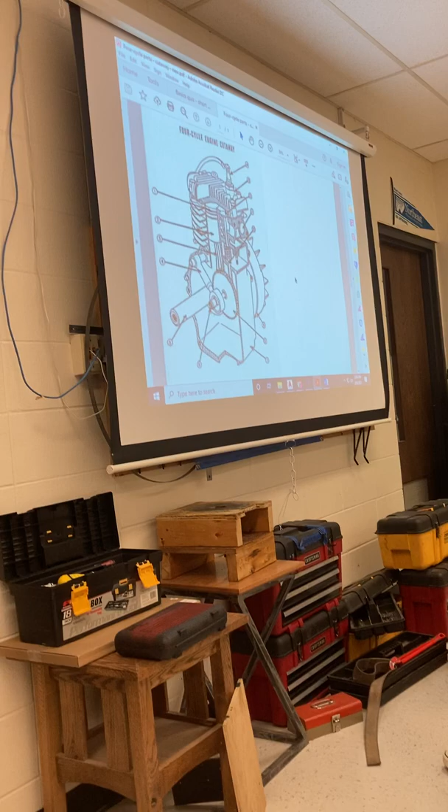Your semester exam is going to cover everything from day one, from when you started in October to now, everything's free game. Every person here ran into something different, whether you brought in something to work on or worked on someone else's, you encountered different experiences through this class. The nuts and bolts of what I'm going to test you on is the basic parts, the basic tools we use, some safety stuff, whatever.

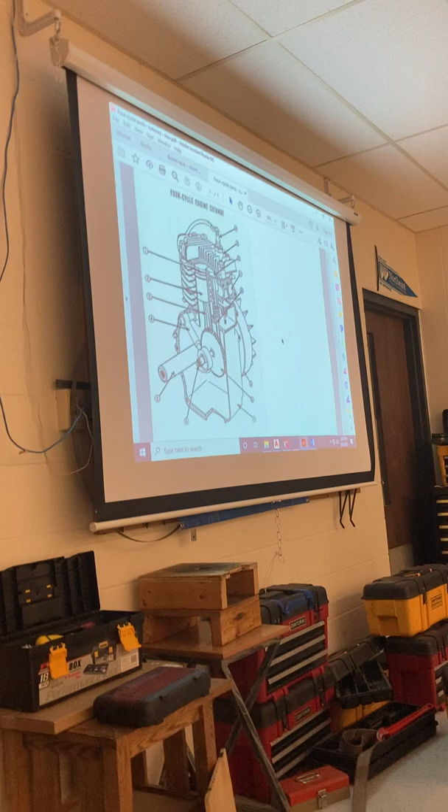Starting with part number 1, what is it? Cameron? Piston rings. Perfect, that's it. We're going step by step.

Number 2 is pointing to what? A piston. You betcha, number 2 is a piston. Guys, don't copy this stuff down — I'd rather have you look at this board and say, yep, that's pointing to the piston, instead of immediately focusing on writing it down. If you don't know it by now, you're probably not going to study it anyway, and you're probably not going to know it Wednesday.

Number 3 would be what? Austin? Connecting rod. Connecting rod, good.

Number 4 is a tricky one, because this one's a little different. What do you think 4 is? Part of the oil pump system. Okay, so that is actually the oil pump system. I put number 4 on there as extra credit, so I'll tell you that on Wednesday, 4 is extra credit.

5 is a what, right here? That main shaft, Wyatt? Crankshaft, thank you. 6 would be what, that other shaft, that slightly smaller one? Good shot, Gavin — camshaft. Camshaft is correct. Crankshaft, camshaft.

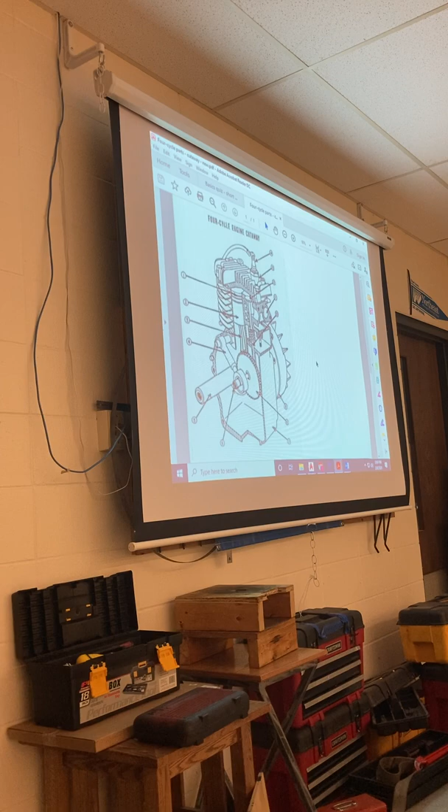Number 8 is pointing to that thing up above it. What's number 8, Samuel? Cam gear. Cam gear is correct, that's turning that camshaft.

Number 9 is pointing to the part off to the right. What do you got, Logan? Flywheel is correct. Now we're going to deviate a bit — what's the significance of a flywheel? We'll come back to that.

Number 10 is called a tappet. Those lift your valves, okay? Those are those short little stubby rods that lifted your valves — those are tappets.

11 is either an exhaust port or an intake port, depending on where it's located. I don't get into which one's which, as long as you know that it's an exhaust or intake port.

Number 12 is pointing to this part right here, this thing, which would be what? Jackson? Say it loud enough, Cameron — valve. That is a valve, thank you.

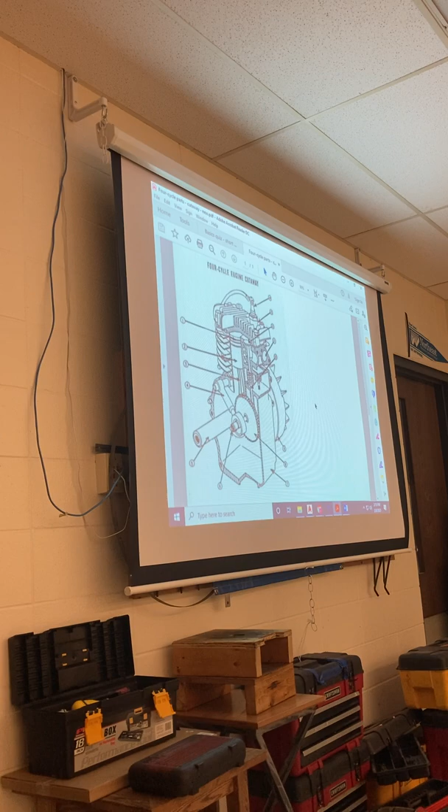Number 13 is pointing to what? This whole top thing up here, Mason? You say it's the whole top thing? Yeah. The head? I don't know. Yeah, cylinder head, correct.

And then the last one, 14, is pointing to what? Austin, what do you got? Spark plug, correct, that's it. That's a large majority of your test.

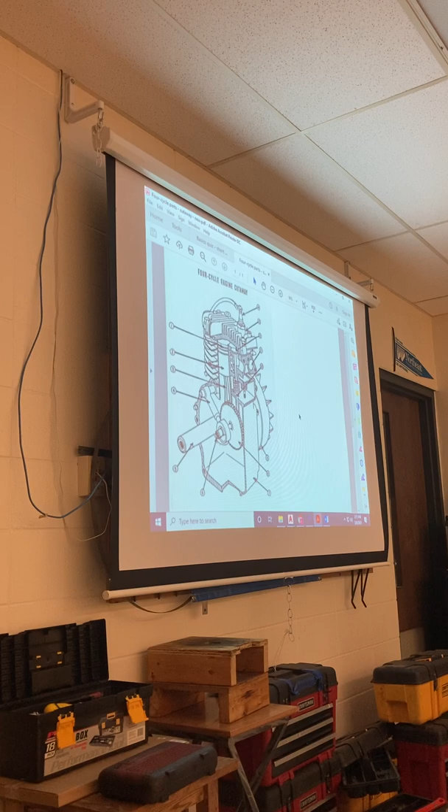Say it — air, an air fuel mixture. How does that air fuel mixture get mixed? Samuel? Carburetor, carburetor mixes it. Okay, the carburetor draws it in, mixes it with air, pushes it to where? Cameron? The intake port, which takes it into the combustion chamber, right, pulls it into the combustion chamber.

So then the spark plug ignites it. Brings me back to Logan, who said earlier that this is the flywheel — what's significant about a flywheel? What does a spinning flywheel do? Wyatt? You betcha, the magnetic field that's created produces an electrical charge, which goes to the spark plug, creating a spark. That makes the fuel air mixture go boom. That expansion and burning of gases pushes this piston down, thus creating linear motion.

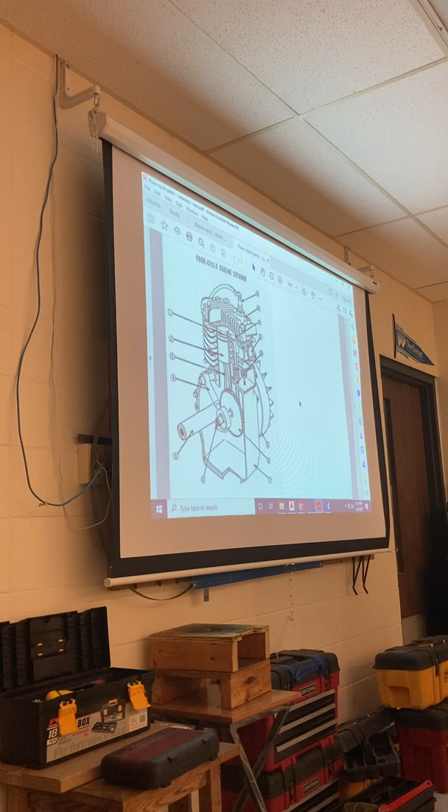The connecting rod attached to this crankshaft, which is offset, that linear motion gets changed to rotary motion. That rotary motion also helps this flywheel to turn, which comes full circle to if I'm starting this thing manually, I pull a recoil rope. I give it a big pull. What did I do? I spun it around. That hopefully pulled air and fuel in through my carburetor into my combustion chamber. When that happened, my flywheel was going around, and it sent the electrical charge, beginning the burning combustion process.

Questions? What didn't I hit on? Valves. The main purpose of valves is they open and close to seal off that combustion chamber. The intake valve opens up and lets air and fuel in. Then when it's burnt and going to push back up to exhaust all those gases out, the exhaust valve opens up and allows it to go out through your exhaust port.

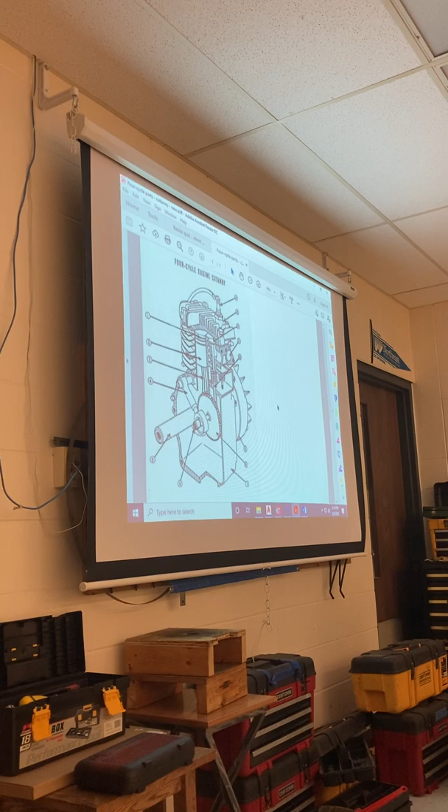In a nutshell, ladies and gentlemen, that's what's going on with every internal combustion motor. Whether it's this big or as big as this room, that in a nutshell is what's going on. This is called a 4-cycle engine.

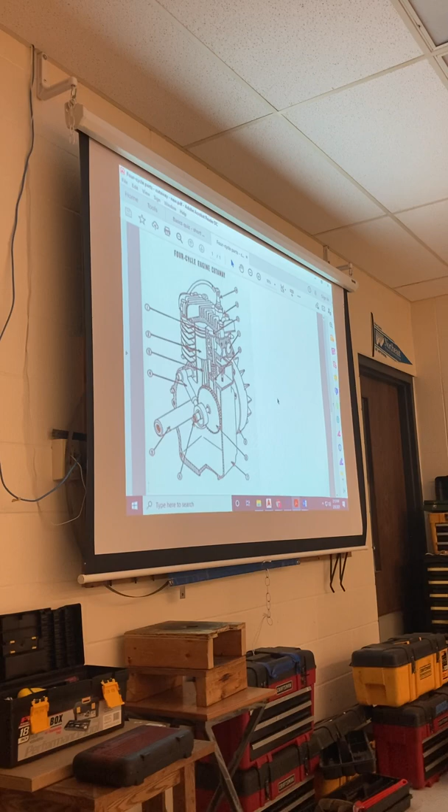Predominantly on this exam, we are talking 4-cycle engines. We are not talking 2-cycle engines. Don't tell me about 2-cycle engines because predominantly we are just talking about 4-cycle. Is that clear, everybody? Yes. When you get the exam, it's going to be about 4-cycle engines. What does that mean, 4 cycles?

There's 4 steps. What are those 4 steps? We call them strokes. Four-stroke engine, 4-cycle engine. What's the first one? Pull that recoil rope. What's that first one that it's got to do for everything to take place? What's the first stroke? Go ahead, Cameron.

Intake. Again, you got a motor here. In a nutshell, that's kind of your motor, okay? This would be your direction of rotation. You got a piston in here. That piston on the intake stroke is going down, right? What's the next stroke?

The second one. Dylan? Compression. On compression, it's going back up.